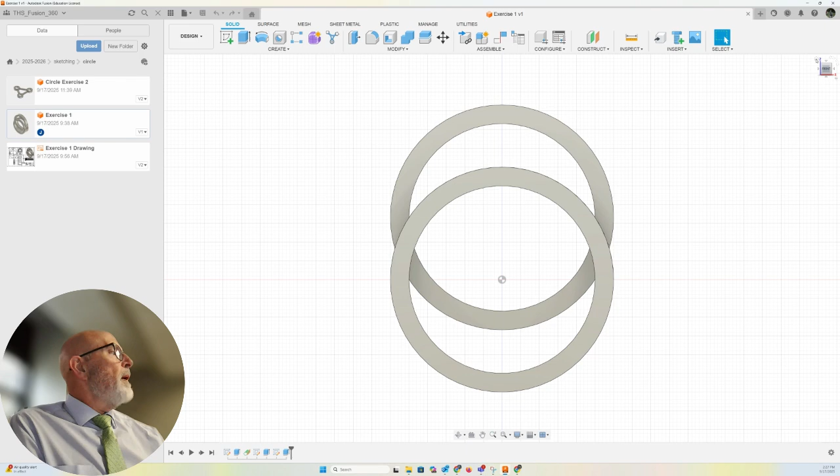Back to the home position. See, there's a cutout here that the inner circle fits in. This section is 20 millimeters in width, while this fits into the opening at 10 millimeters. Let's take a look at the diagrams and see what we've got.

Right here we are, okay, so here's the front view. I've got the lower ring set here with center point, and here's the upper ring from the front. And what I see is those outer edges.

Here's the cutout, so the cutout comes down 30 millimeters. That's going to be the center point of these circles right there. And the upper ring hits these edges right there on this face. So that tells us a little bit about how we're going to design this.

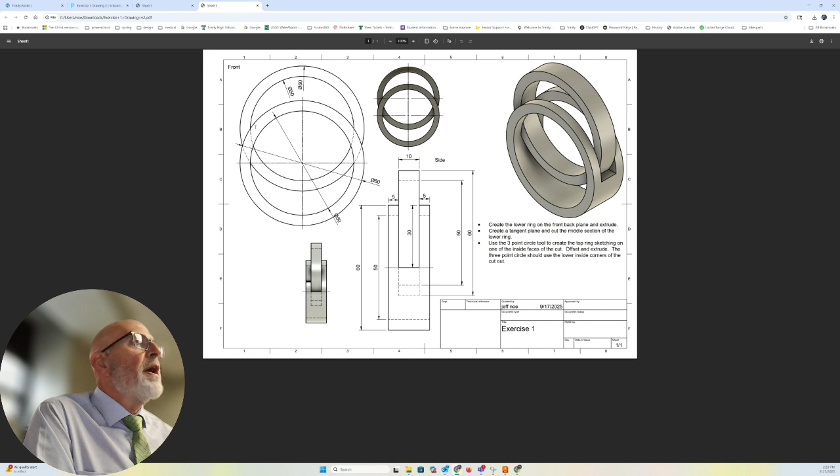I've simplified this particular drawing to just the first section here. This is actually what the project used to be. So if I create this ring, 60 millimeters offset by 5, which gives me a 50 millimeter diameter circle there. Extrude that ring back 20 millimeters.

I have this shape. To get the cutout, I created a tangent plane. The cutout is 10 millimeters wide. So I created a rectangle that is 60 millimeters by 10 millimeters and centered it on the design and cut that out.

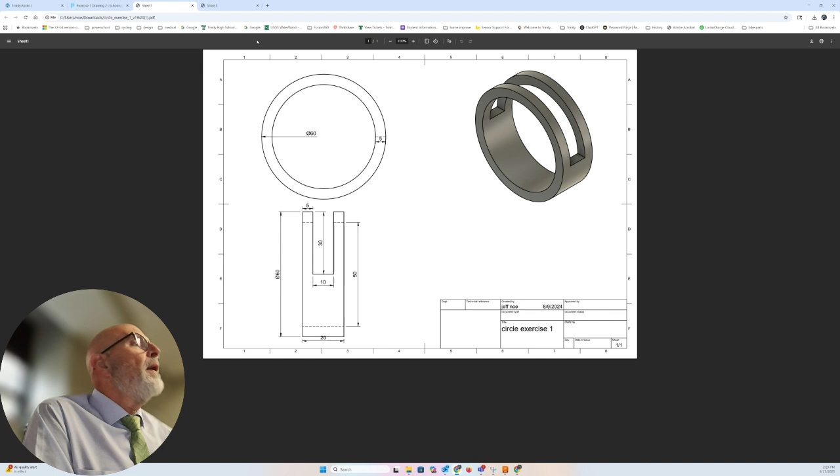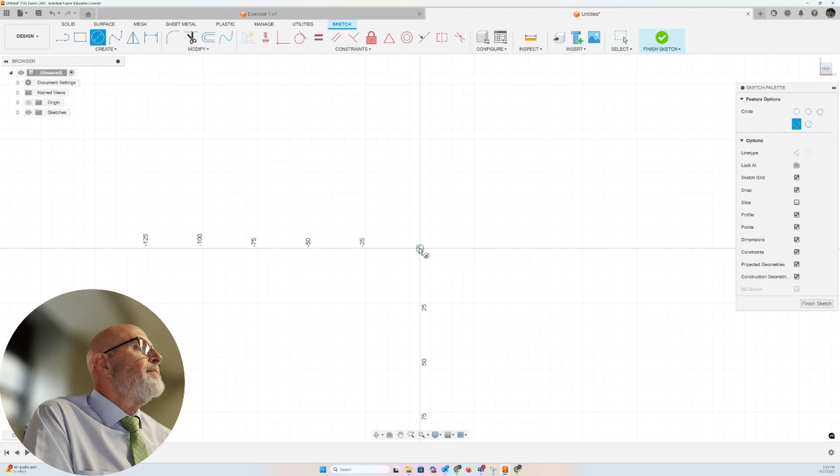So let's go ahead and get started. All right, close the data panel here. Let's create a sketch from the back plane. From the origin, let's create our center diameter circle, 60 millimeters, enter.

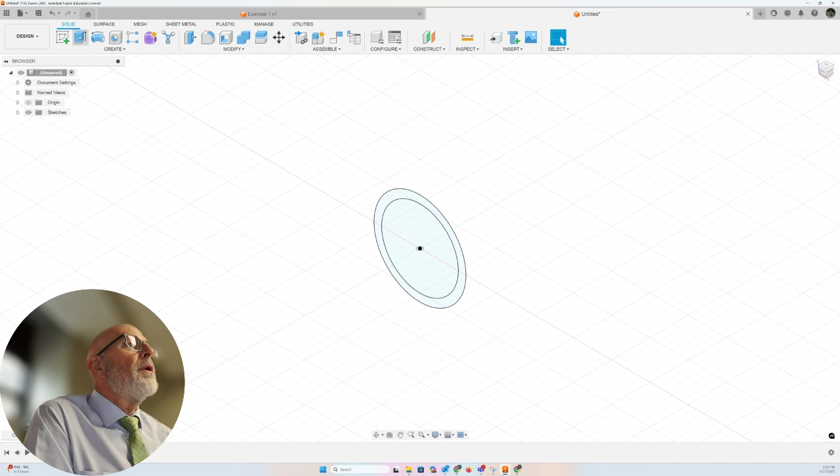Let's offset it to create our inner circle of 50 millimeters in diameter, so negative 5 will give me a 50 millimeter circle because we're altering the radius there. And there I have my first sketch. Let's finish sketch, let's extrude. All right, there we are, 20 millimeters.

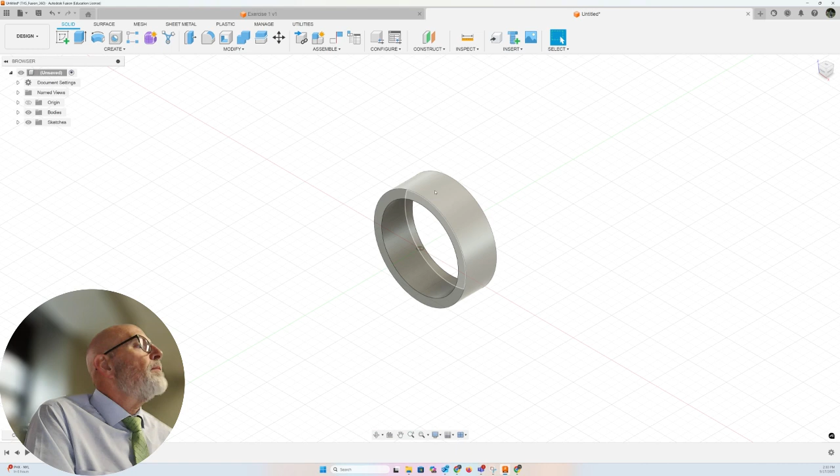Very good. So now I need to cut out a 10 millimeter opening that's centered on the top, and it goes down 30 millimeters, so it's going to go halfway down my 60 millimeter circle there. So what I'm going to do is create a tangent plane to my rounded surface here. So let's go construct tangent plane.

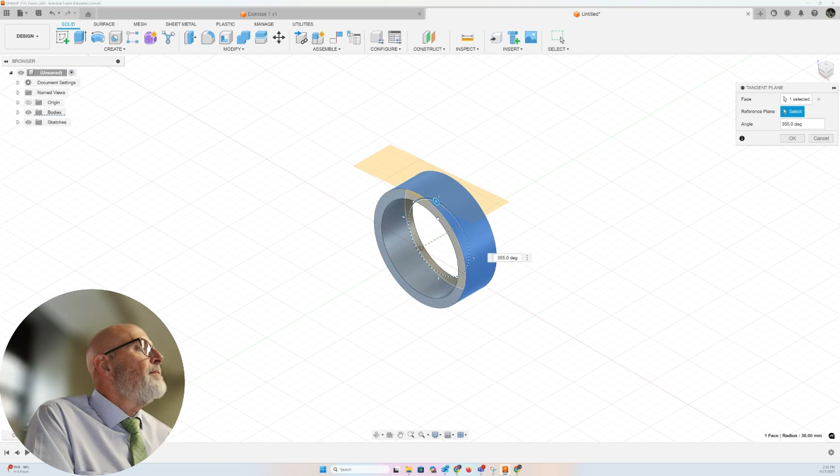There we are, I'm going to select my surface. Now you can see that you can bring this plane around, and I've got the degrees in which I can move it. Okay, I want to be on top, so I'm going to leave it at 0. There we are, and click OK.

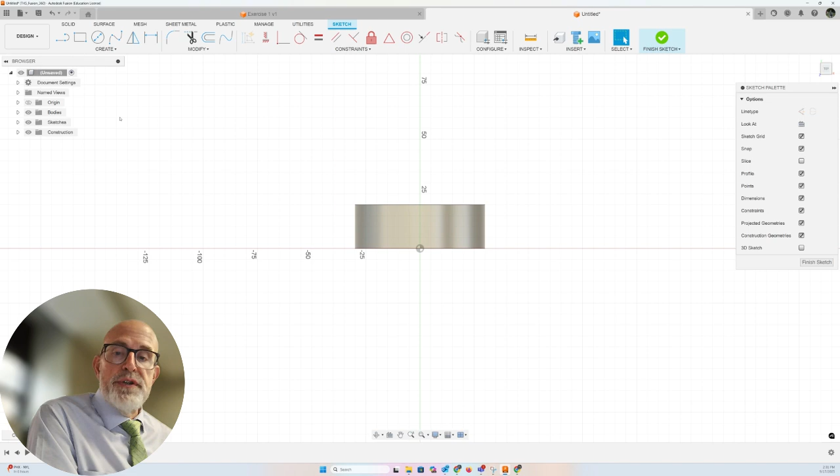There's my plane, let's create a sketch on that plane now. Now, the origin is here on the edge of my design. Probably could have made this easier on myself if on my initial extrusion, instead of going one direction 20 millimeters, I'd changed my direction to symmetrical and done 10 millimeters each direction—that would have centered the origin in my design and made my life easier, but I'll deal with this.

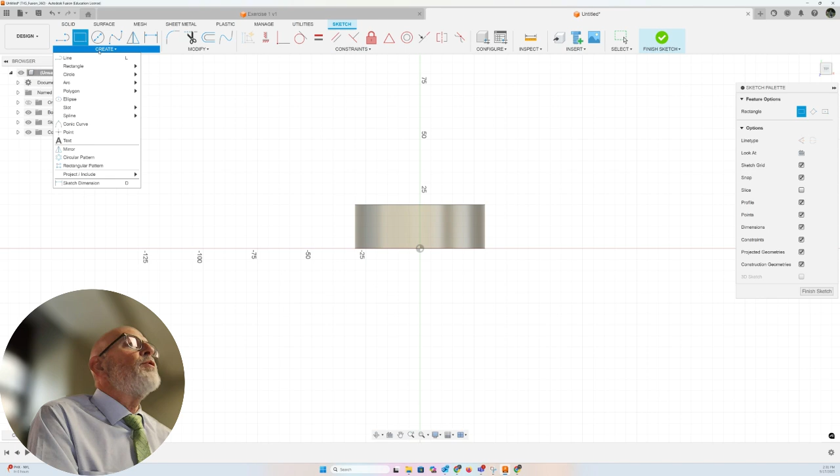So I'm going to create a 2-point rectangle. Actually, let's change it from a 2-point rectangle to a center rectangle, and I'm going to go up the y-axis. I want it 10 millimeters by 60, because that should cover the diameter of my design. Enter. Let's position my rectangle.

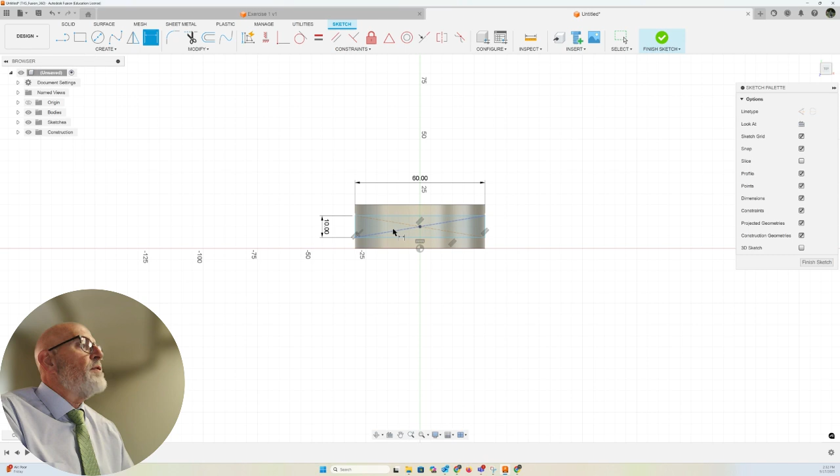So I'm 20 millimeters total, 10 millimeters is going to be cut out, so I want 5 millimeters on either side. So from the origin to this edge, let's set it to be 5, not 4, 5. Enter. Now I'm positioned correctly.

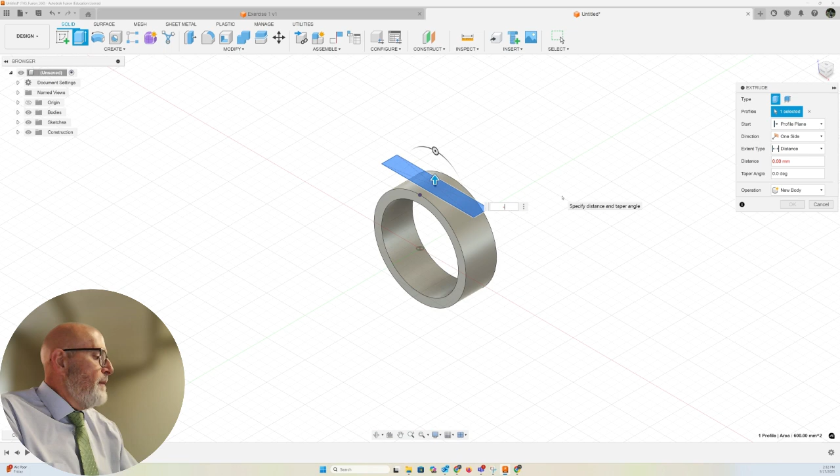Let's finish sketch. There's my rectangle that I created. Let's extrude, and I'm going to go negative 30 millimeters down. And there is my cutout.

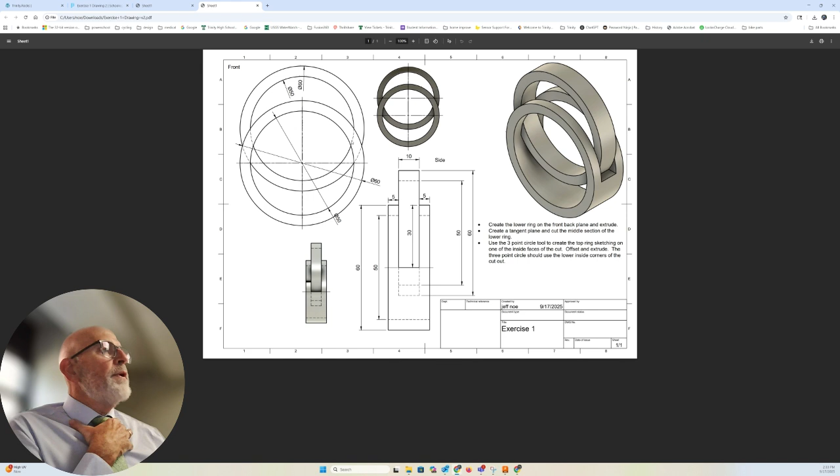So if I know 2 points here, and I know that the circle's diameter is 60 millimeters, then the 3-point circle will work for me in creating this. So let's use that. I'm going to create a sketch.

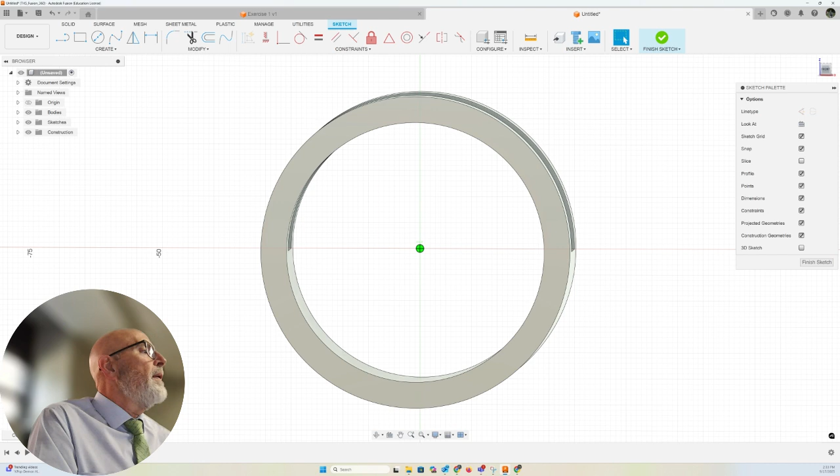I want this face—I could do the other side if I was turned around, but this face right there. Select it, there we are. Now let's go back, I can see my points here. There's my point right there and the point right there. So let's go create circle, 3-point circle.

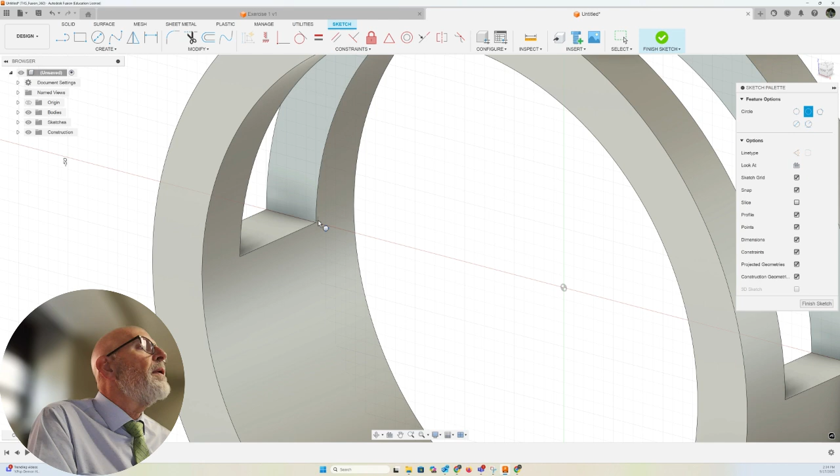I'm going to select this face right over here, okay, right there at that corner, see it, right there. And I'm going to select this corner right there. And there's my circle, it starts to draw.

I'm going to come up, type in a value of 60, and click. And there I have my 3-point circle. See how it goes here, here, and then I came up, gave it my diameter, and there I am.

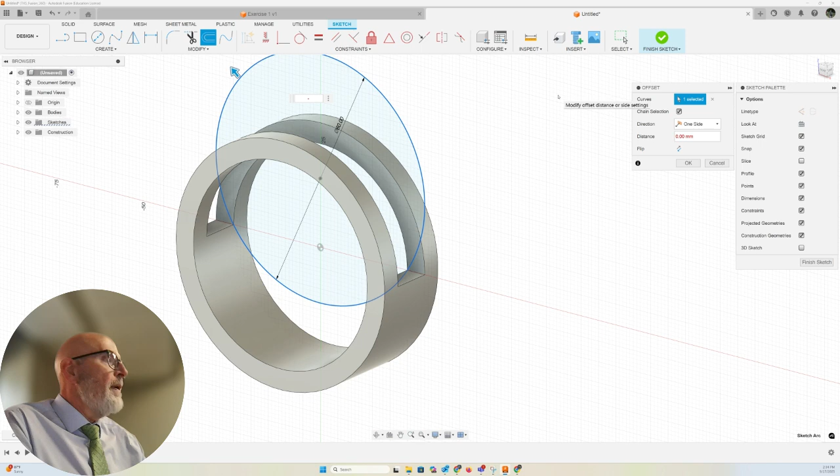Let's offset that circle, negative 5, enter, finish sketch. And you see where my sketch is positioned—it's on this face right here that I selected to sketch on.

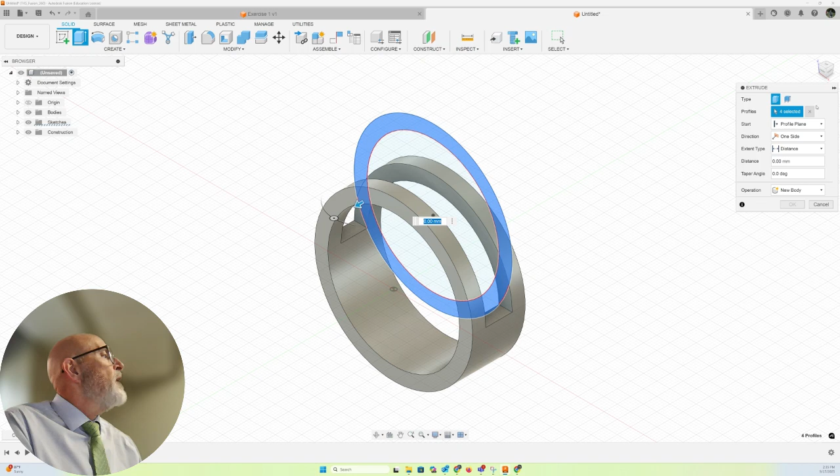And now all I have to do is extrude, select that shape. All right, let's go back home. Okay, the face that I'm sketching on cuts off, so I've got to make these additional selections. I've got 4 items selected in total. The cutout is 10 millimeters wide, so I'm going to extrude 10 millimeters. I want it to be a new body, and click OK.

And now I have my 2 bodies. Appearance.

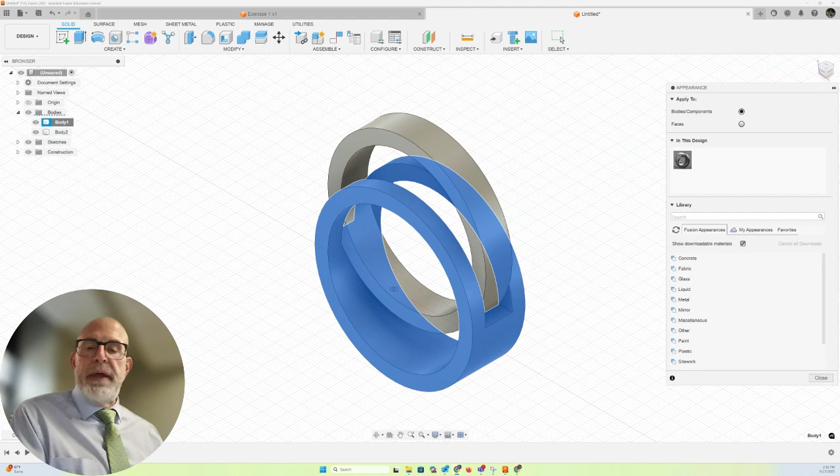Hold on just a second. All right, sorry about that, phone call. And let's put it this way, I'm 10 minutes in, so I'm not going to redo the video over that phone call.

All right, I'm working on the appearance. Let's go metal, let's go aluminum, let's make it a nice anodized glossy red. We've got that. Oh, as much as I hate to do blue, I'll do blue on the top one, and we'll drop blue there.

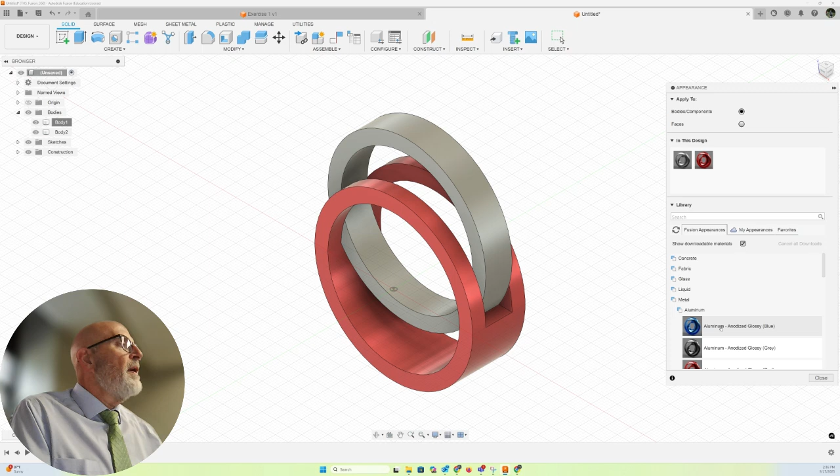Close, and we will save it.